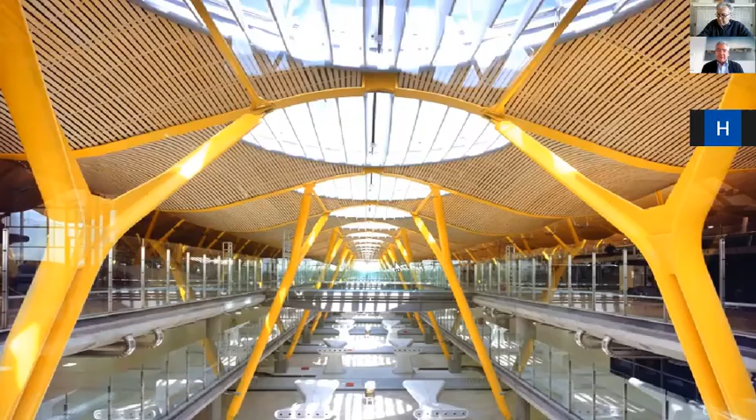Just to put it in context, I hope you see my mouse. The building we just saw is where my mouse is moving. The one on the left, colored in yellow, is the terminal building, the satellite building, which is where you would have arrived. Just to put it into context, because people don't realize how big those buildings are.

They are over 1 kilometer long. You see in the background the Madrid skyline, you see the 4 towers. The tallest tower is 249 meters. If you were to put the terminal building up vertical, it would be this size, 1,142 meters tall. But we're now expanding it, making it even 360 meters longer.

Just to give you an example, the Burj Khalifa, the largest building in the world, is 828 meters. So once the new terminal building is constructed, it would be like building two Burj Khalifas, one on top of each other. And the reason I bring this into context is about real estate decision-making.

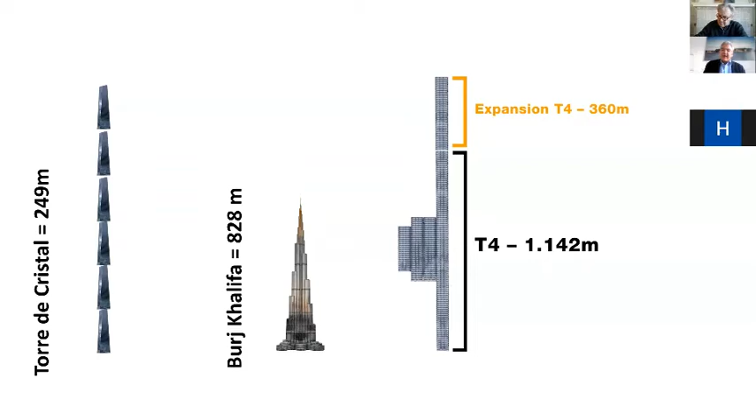What makes a city, what makes a country take a forward decision to build an infrastructure like this? And what's its value? Definitely its value is not how much it costs to build. Its value is how much is the front door to Madrid worth? How effective can this airport be to compete with London Heathrow's hub or with Frankfurt's hub? What type of other advantages and circumstances does this piece of infrastructure bring in connection with high-speed rails, with other parts of the country?

So it's extremely difficult to put a value to something like this. I will come back to other similar issues on value. The airport is up here on the top right-hand corner, and we're moving on to the first project I want to talk to you about, which is in AZCA.

Madrid, let me put this other picture, sorry. This one. Madrid has a central spine, which runs from north, where my mouse is, all the way down to the south. So there's two train stations in Madrid, one on the north, one on the south.

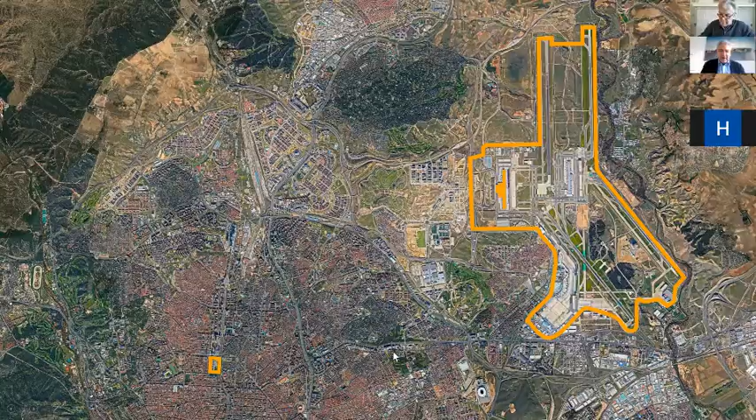And this is AZCA. AZCA was built here. Here's the other train station. AZCA was built in the 1970s as a business district for Madrid. It takes this huge city block, which you see here on the top left. And it's just opposite, for those of you that like football, soccer, Real Madrid's football stadium. Just here, where my mouse is, that's Real Madrid's football stadium.

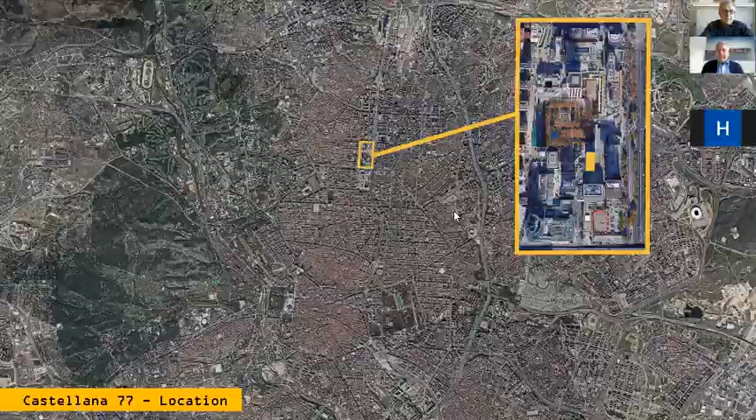And the building that we got commissioned to transform, and I will explain why, was a building that had no identity, had no scale, no technology whatsoever, and therefore was a building that was empty and nobody wanted. You see here where the question mark is, that's where the building actually is. It's actually got an address, Castellana 77, the number of the street.

You used to get into a taxi and say, please take me to Castellana 77, and the drivers wouldn't know what it was. They couldn't take you to this building. It's right there in the middle of that island, AZCA, the financial district. This is the appearance it had at the time, completely empty, nobody wanted it. It was acquired by a developer who turned to us and said, what can you do with this building?

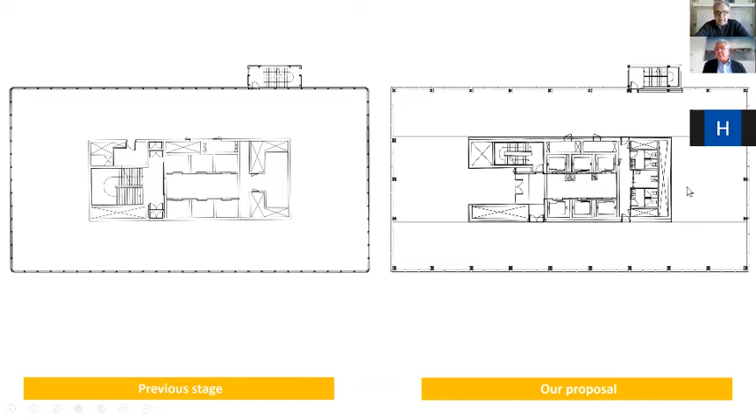The first thing we did was give it a hard core at its core. On the left you can see the 3 elevators and the fire escape, and the building services around the core. We basically rationalized the core, keeping the elevators where they were but changing all the restrooms. We reorganized and shifted the building services, but most important, we moved the staircase to one side so that when you come out of the elevator, you have a nice view out. Previously, when you came out of the elevator, you had to exit through one door and then get into the office space, either left or right. So by changing the core, we gave a lot more value to the actual floor plan.

The second thing we did was use software available to us at the time, along with another one we developed, combining them to understand how the sun hit this building. This is a completely isolated tower with 4 very pure facades, a north, a south, an east, and a west facade. The heat conditions are completely different across them in Madrid, so you have to design thinking about every orientation. Using this software, we developed hundreds of different shading elements for each individual facade.

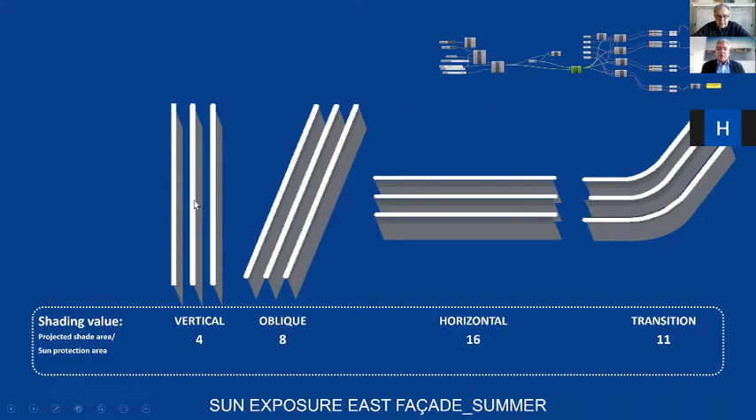One of the things we found was that when the sun is low, which is normally on the east at sunrise, the best shading devices are vertical. As the sun progresses and rises into the sky, it becomes more vertical, and therefore the best elements to protect the facade become horizontal. Then there's a transition that works well between the vertical and the horizontal.

We analyzed the east facade and found that at 11 o'clock in the morning, which is not a bad hour, 58% of the facade would be in shade thanks to those blades. By 1 o'clock, the worst condition with the hottest sun, 98% of the facade is covered and not receiving any solar radiation. We did the same for every orientation.

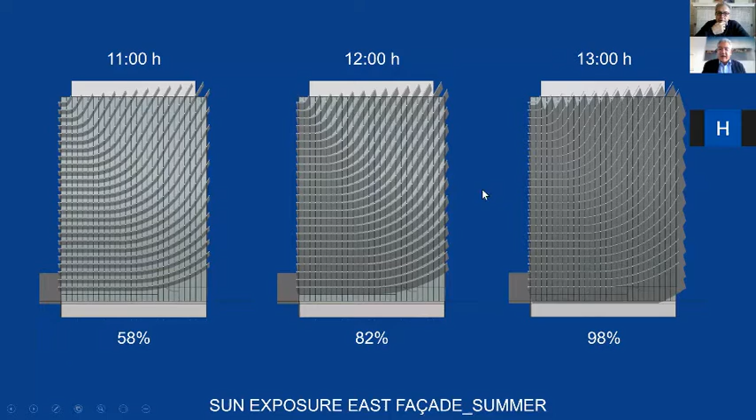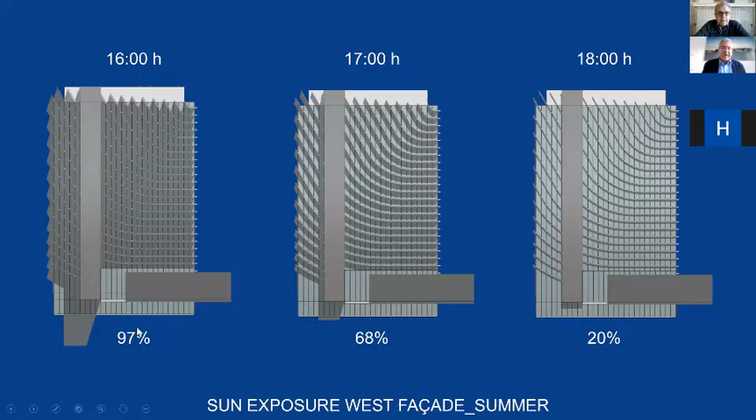I'm just showing you here the west facade, the previous one was the east facade. Again, at the worst hour, 4 p.m., 97% is covered.

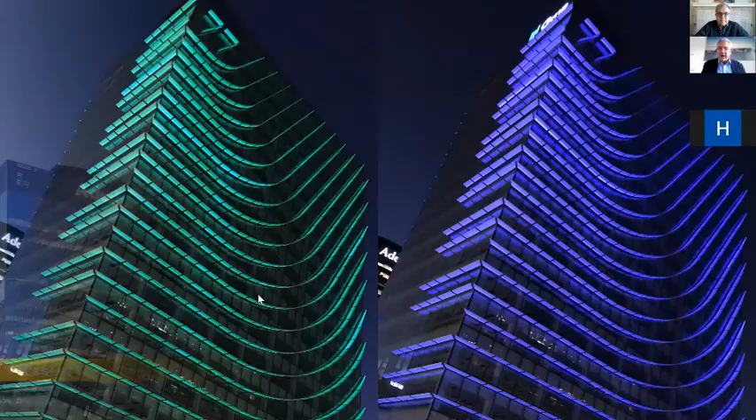This is the before and the after. On the left, the building that no one wanted, and on the right, the building that emerged out of this system, using technology and applying construction technology to make something extremely functional, very elegant, and with other fun bits, like during the day it's unlit, but at night it can be lit, with lots of different things you can do with it, using colors or rainbow effects. So now the building has an identity, and surprise, surprise, it's full. There's not a single square foot which isn't leased, even post-COVID, and it's become the second most expensive building in Madrid per square foot in terms of rent. So obviously the client is very happy.

Let me show you a quick time lapse.

Some of you may think, why don't these shades run all the way through to the south facade? It's very simple: there's an adjacent building right here which belongs to someone else. So the air rights that govern this building, which could potentially grow in height, are what's stopping those horizontal shades from running all the way through the south facade and joining the blades on the west.

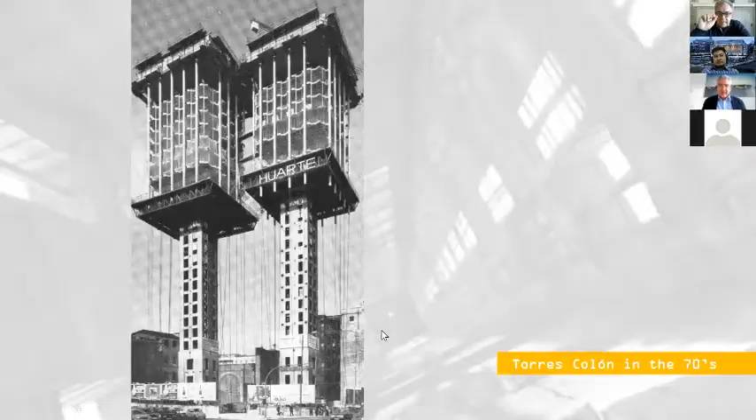who is the owner of those two towers here, called Colón Towers. This is Plaza de Colón, Columbus, which is probably the most interesting urban challenge Madrid faces. They sit here in a corner, and they were built from the top down, using a construction technology in fashion at the time, called suspended architecture.

This basically meant there are no internal columns. You have a central core, and from the central core, you have a big concrete head from which tensors hang or suspend, and the floor slabs go from the core to the tensors. So this was the building in the 1970s.

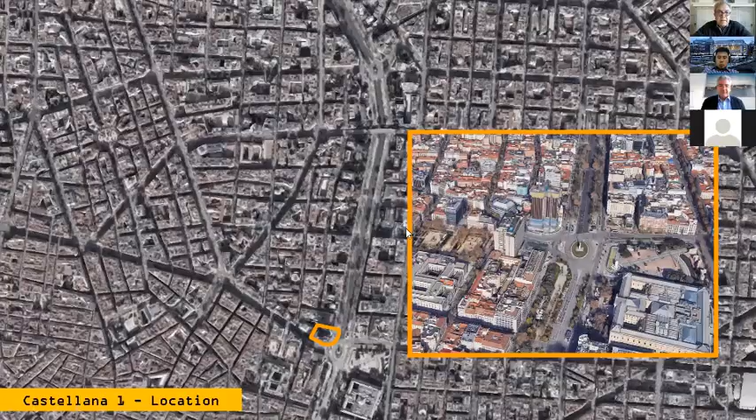Following that, in the 1990s—I've never found out how much this building cost at the time, you'd have to annualize it from 1970—in any case, in the 1990s a British company who owned them initiated a complete remodel, which consisted of a new skin, this orange thing you see. So it actually had two skins, the original one and the new one. They built a new escape stair, this thing in between, and to support this stair, they built a huge beam from which the stair was suspended.

And then they capriciously put all these green things around to conceal the beam, with two lasers shining up into the sky. In the 1990s, the current owner bought these towers for 50 million euros. In 2017, they had an offer for 160 million. So in 17 years, the cost of these towers had risen by more than 3 times.

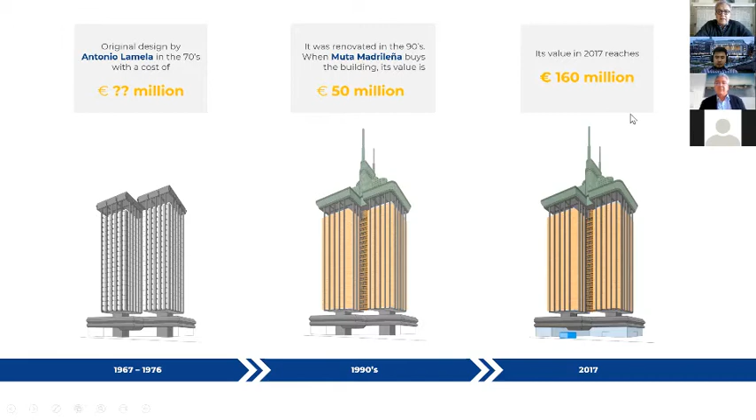Now, why would the client be interested in selling these towers? One, the floor space was very limited and very small. As you can see here, the net available floor to let as office space is what you see in purple, and everything else in white is the gross area. So it had a gross to net of 50%, which is extremely inefficient.

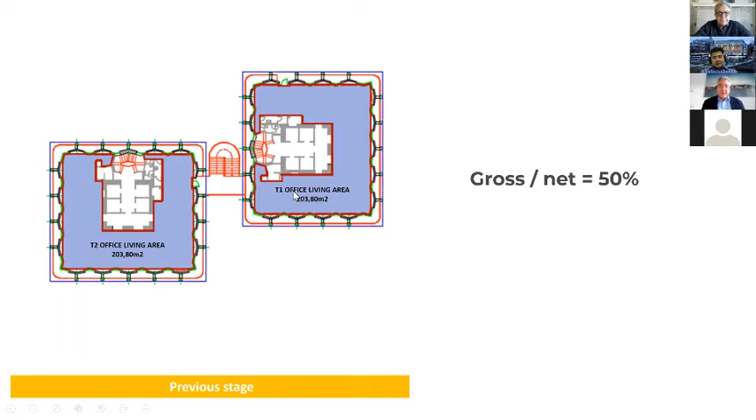Secondly, the towers were not connected, so you couldn't have two floors on the same level. You couldn't cross from one to the other unless you came out through the fire escape. And thirdly, the floor was so small—200 square meters, or 2,000 square feet—which is not a very good office size.

So we actually had a go at this tower, and before the client decided to sell for 160, they were really in favor of selling. They asked us, what would you do with the towers if you could? I said, well, the first thing I would do is get rid of the elevators, as you can see here in black—3 plus 3 is 6—and I would add an extra one, building 7, putting them outside of the towers.

The second thing I would do is eliminate the fire stair and build two new stairs inside the cores, which are those two things you see here. And the third thing I would do is demolish the restrooms, which is what you see in green, and put them into the cores.

Then join the towers, and suddenly you have one floor plate, sufficiently big to be attractive for the market, completely liberated of obstacles like fire escapes and restrooms. As you can see here, this is basically our conceptual proposal. We went from a gross to net of 50% to a gross to net of 81%.

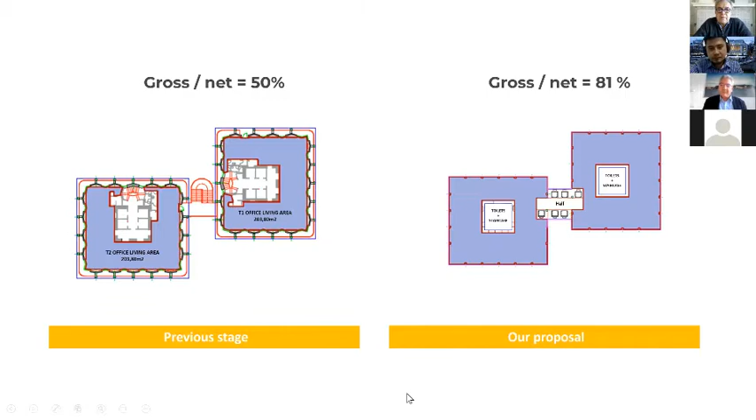There was a proposal that had the elevators in the middle, then they eventually ended up here on the north, as you see. So this was enough for the client to decide not to sell the towers and to commission us to take this project forward.

So the next thing we did was—the city regulations were very clear—we couldn't increase the total area of the building, but we could shift area from place to place. We acknowledged the importance of going higher, and the impressive views we have from up there. This axonometric diagram shows very clearly what we did.

I explained before, we're getting rid of the antenna up here, and we're getting rid of all this fire escape. But the original access was through the basement, so we moved the access to ground floor. Then we demolished two entire floors, here and here, the ones you see in purple, because they didn't really have the best quality. And we chamfered all the corners, and all of that area is what we moved up here.

So I know the diagram looks incredible or impossible, but it is absolutely perfectly square—20,298.3 square meters.

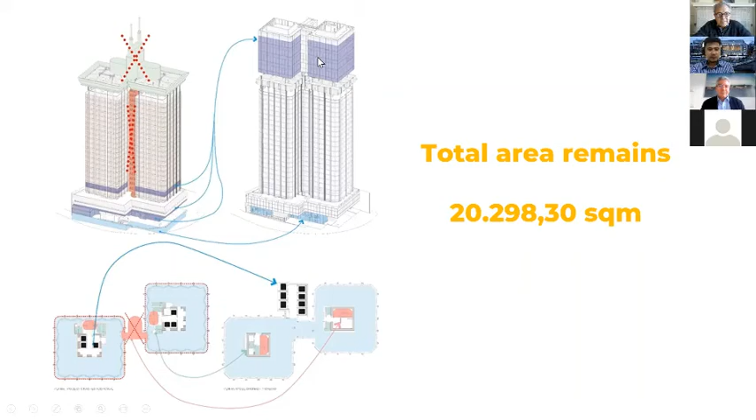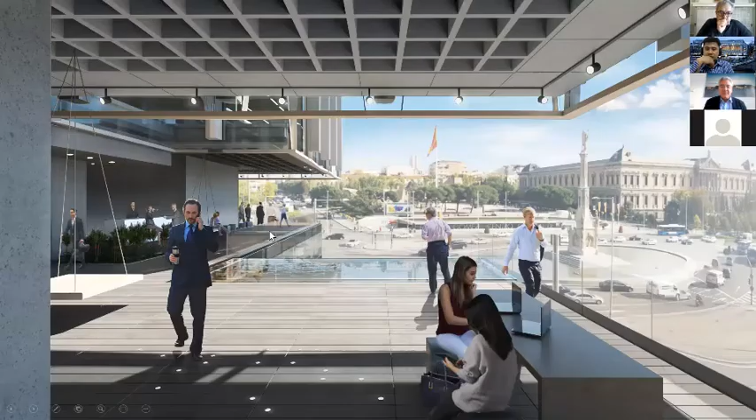And this is what is currently being constructed, it's under construction right now. This will be the new entrance, the one we've brought down from the basement. This is a new terrace that we are occupying. With the demolishment of one of the floors, we get a much nicer height, and we can actually provide this terrace to the city.

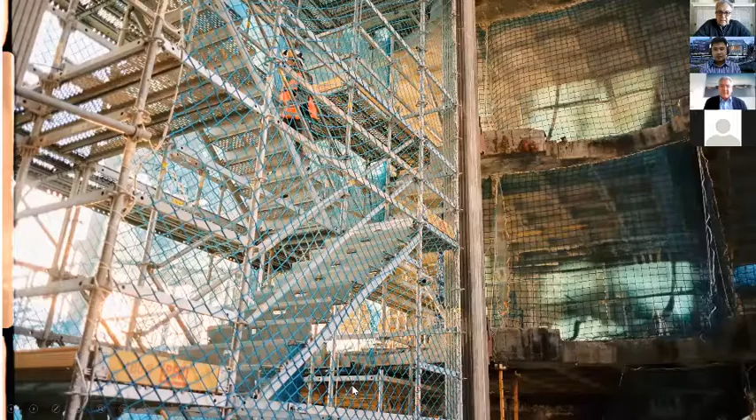This is some photos of the current construction site. You would not believe the state of the footings that we found. There is an underground river, and for the last 50 years that river's been washing away most of the soil, so they looked like they were being suspended by the air.

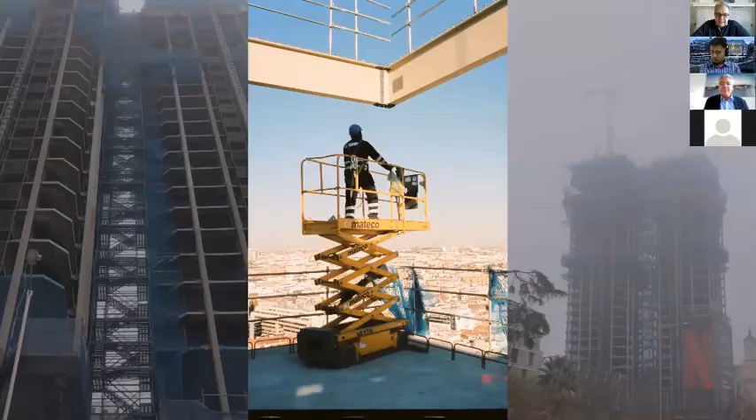And there's more than 80 people down there. They've been working for 6 months, 80 people down there, repiloting the footings of each of these towers. An incredible construction process, extremely complicated.

But my question to you is, what will be the economic value of these towers after our intervention? If you remember, it went from 50 to 160 just 5 years ago. And the current valuation post-COVID is saying that these towers, when they're completed next year, will be, if not anything, above 400 million.

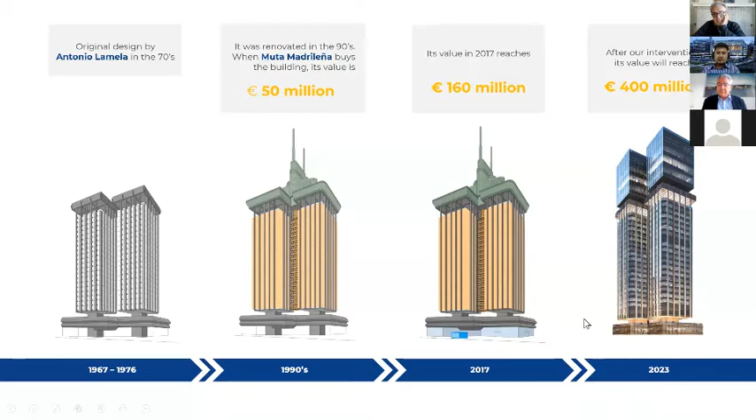So that to me is very, a good investment for a developer.

And I thought I would leave it here for questions, because I think it's more enriching to answer questions than continue talking about buildings. I just wanted to show you 2 examples, which I think covered the 4 topics that Rick set me: real estate value, decision-making, construction technology, and the use of data and visualizations.

I've left public-private partnerships. I have a hospital, if you want to talk about. We've done a number of hospitals under that model, but I thought I would open it for questions now.

I want to, first of all, thank you for a superb presentation. We had the benefit of having a drink together in Lima last week and talking about what students have been doing their research projects on this past semester. And as you mentioned, real estate and valuation and construction technology were very high on the list of 4 topics.

These projects are amazing, and putting the architectural and real estate parameters together in conjoined gets us out of the typical architecture school aesthetic, and the same with Castellana 77 with the starting point of heat gain. There's a logic to everything that you presented that is also, I have to say, as an architect, just quite beautiful. So thank you for that.

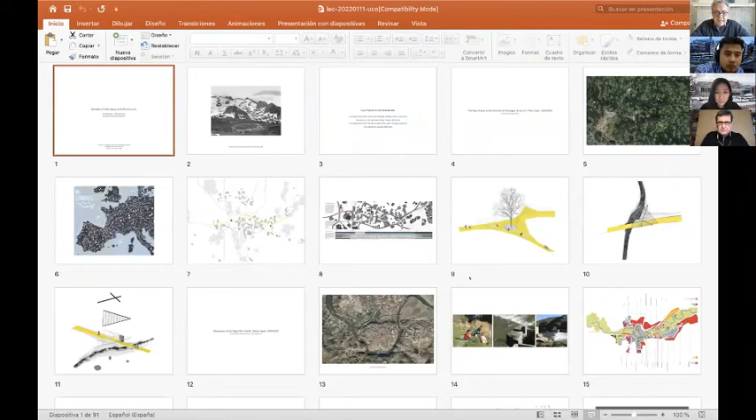Well, we are in a small office based in Madrid. We have been working in other places in Europe and also in Latin America, mostly in Peru and in Colombia.

In places where we find the same spirit and the same way of designing cities, because many places in Latin America are designing cities and public spaces in a very innovative way. But we have, as I said, a very particular approach, with projects in which we share the work with other people, with engineers. No, I would like to begin with this image that you probably know, from Richard Long.

Richard Long is a very famous British artist. Most of the work Richard Long has done in many places in the world is to establish a relation between the human and its artificial way of living and nature, and how simple things like this image, in which we see this circle of stones in the Pyrenees, in the mountains between Spain and France, establish this relation between what's happening with the human, what we need with our infrastructures, because infrastructure is the way in which we are building the world, and at the same time how to establish a poetic and visual relation with the environment in which we are working.

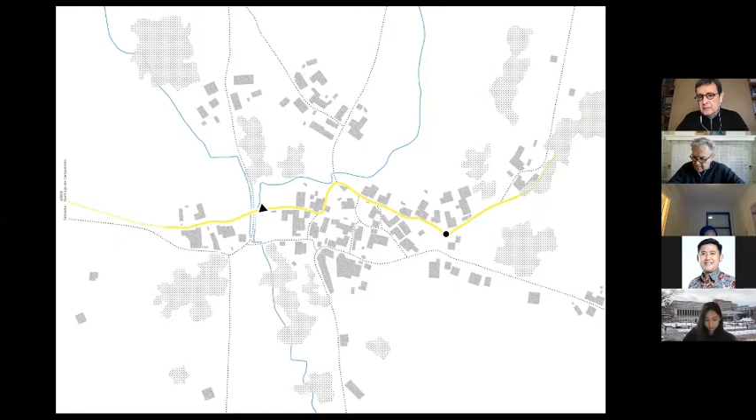That is a rule, and that is the other thing—two places, one is a very small square, just a cross of paths that you can see in the middle, and a place to take a rest in a very small creek where you can wash your feet or something like that.

The understanding of the project is the node, in which we identify places where something could happen, but at the same time the rules for building different categories of urban or more rural ways of designing the path.

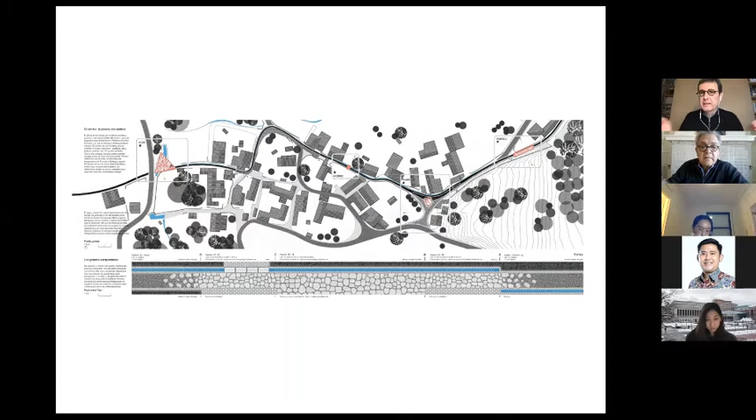You can see in the bottom part of the slide how the path could be very urban in the middle of this little town, or completely rural when you are walking between the towns or villages, and how to establish the rule of the connection, but at the same time what could happen in the nodes or junctions.

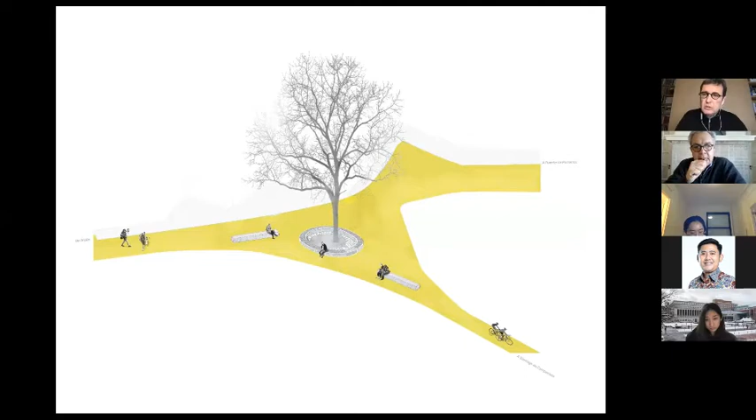This is one simple thing—there is a big oak tree there, and of course now this is a place full of cars without any sense. We try to map this tree and map the pedestrians who could cross completely freely, using the same rules for designing the pavement around these small places where you can join and talk with other pilgrims or with the people living there.

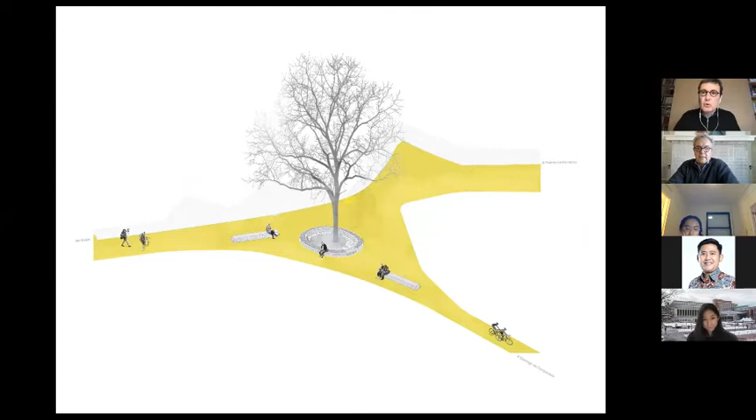And the other one is a shadow—a very small structure that gives protection from the sun. In summer it's not very hot, but the sun could be hard, in the place where the path crosses a creek.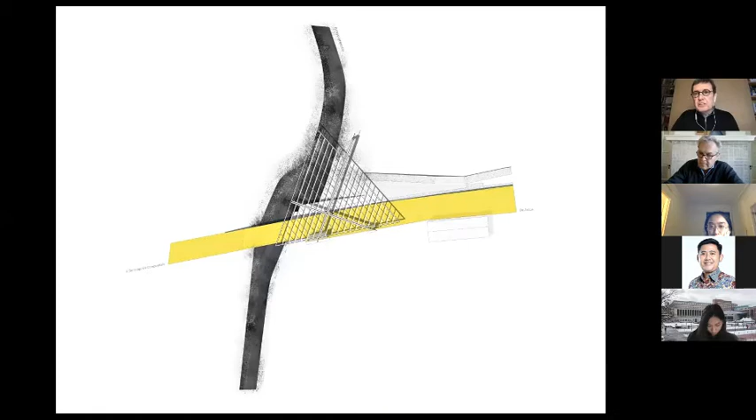You can see here the different layers in which we have been working: the path colored in yellow, the foundations that are completely dry, built without using concrete, just using stones, the structure of the shade, and the vegetation that will cover completely this shadow.

So it's a place in which you can wash your feet, talk with someone, take a rest, and reflect about what you are doing, why you are walking, in which way, where you are, etc.

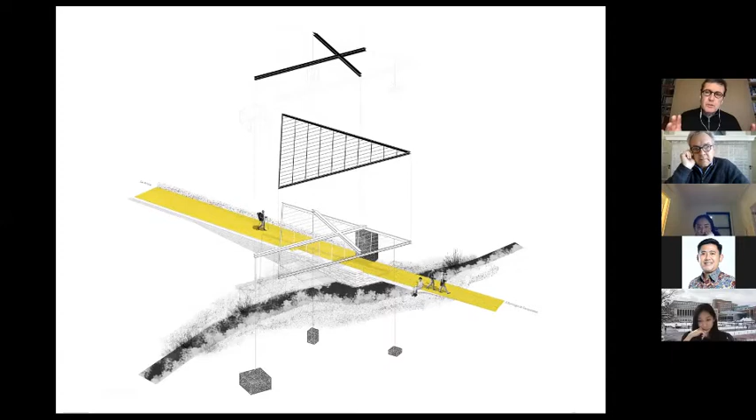So the project consists in finding a rule for designing the connection, thinking that the path is enormous. We're talking about thousands of kilometers of paths, with the idea of extending these rules to many other places along the path. The other thing is identifying the places where something could happen, where people could talk or an event could happen.

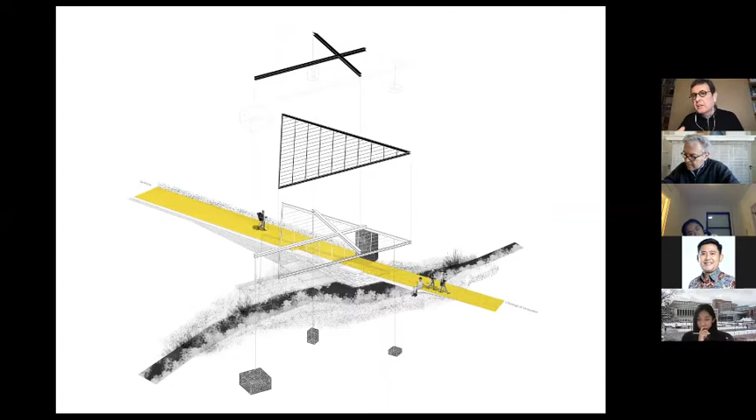Very simple thing, but I think extremely delicate, and always flying or playing with the idea of flying structures—something that you know is protecting you, but you don't know exactly how it's built.

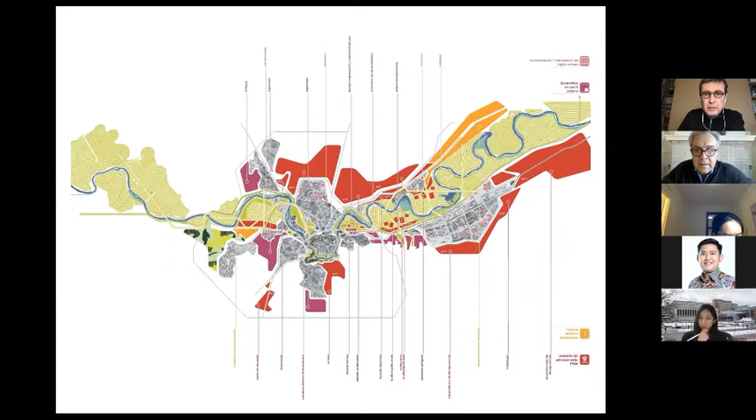So we have the commission for the restoration of the margins of the river along a big area of about 30 kilometers. We've been working there for many years, trying to understand this valuable place—completely artificial, but at the same time with very high natural values, because the river is important, but as I said, very artificial, since in the last 2,000 years these places have been manipulated by humans.

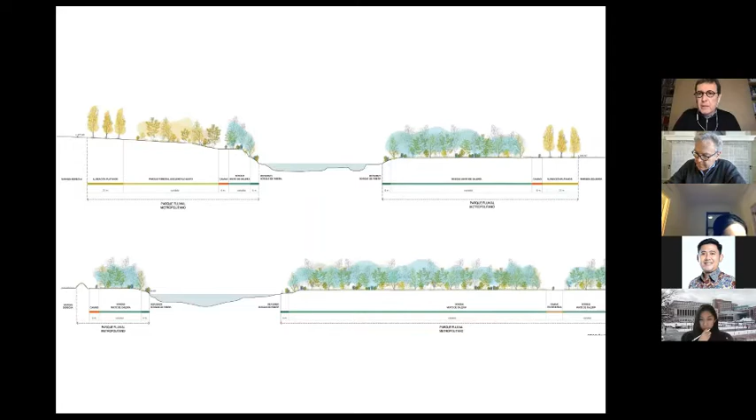So the first part of the project was how to deal with this big area. We tried to understand, in terms of ecological issues, how to reconstruct or renaturalize the borders and sides of the river, because the topography had been manipulated for flood protection and so on. Also in the inner part of the project, close to the city, we tried to understand the events that happen there.

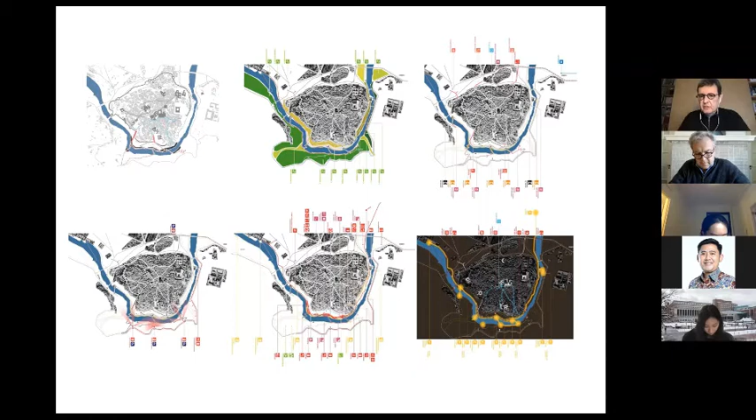The river is also very artificial, because there are many small dams for producing electricity, all from the 19th century, and mills that use the water and so on. So this is a place where the mixture between the artificial and the natural is very difficult to distinguish. And this is the place that you see.

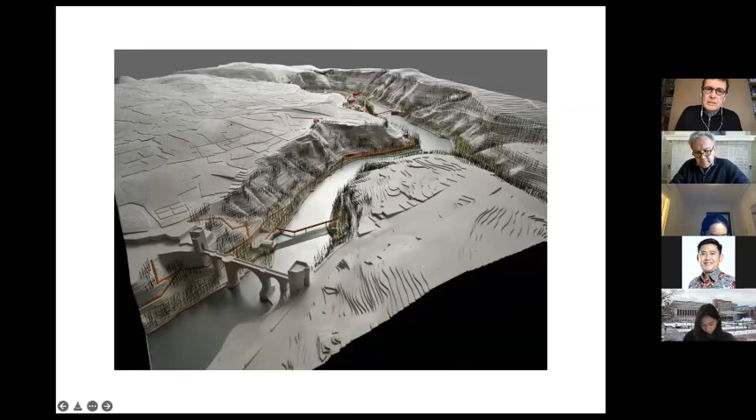So this is a very dramatic creek with steep slopes. Here you can see on the left side of the slide the hill where the city is settled, and the river at the bottom. The problem here is accessibility—how to go from the city to the river. It's easy to go down, but not so easy to go up. How to deal with and protect the nature there, and at the same time offer the city a place to be in a secure, comfortable way.

How to deal with the machinery and the industrial heritage that the river has, and how to cross the river.

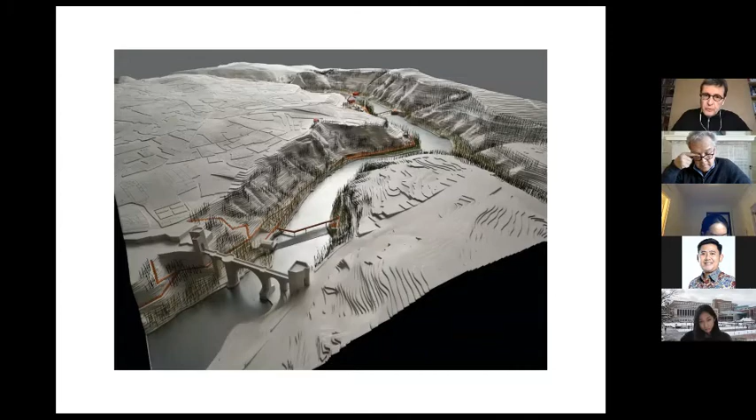So you can see here the model, and then these bridges that we propose, which I'm going to talk about, and this green area that is the places in which we work, and this yellow path that is like an urban salon or urban hall, an urban space in which you are mixing what's happened up and what's happened down.

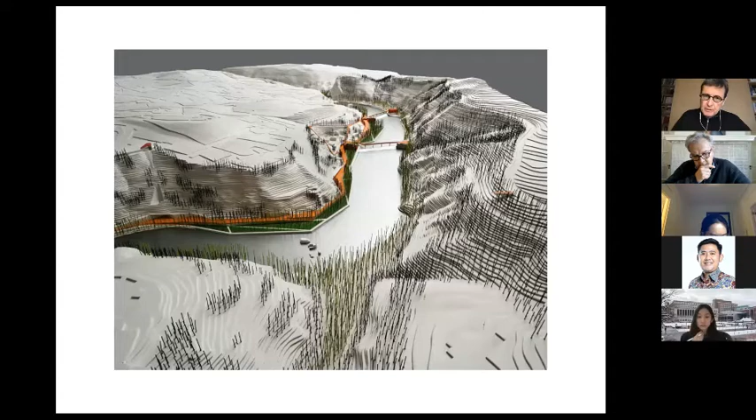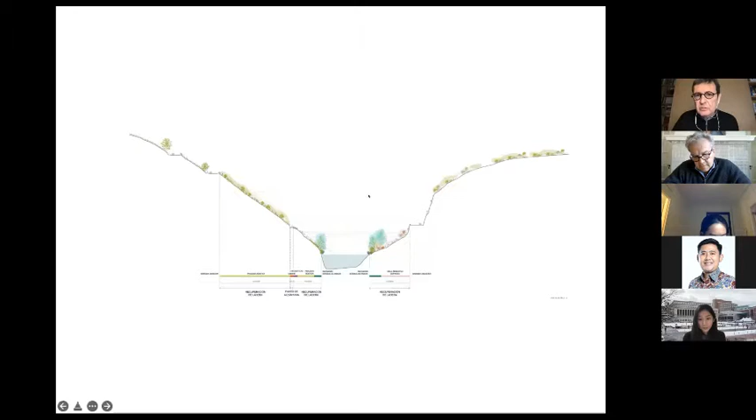So this is the model, and you can see here the sections of this place, which are very dramatic, because as I said, when you are down, close to the river, you cannot see anything except the nature and the river. Here you can see also the next one.

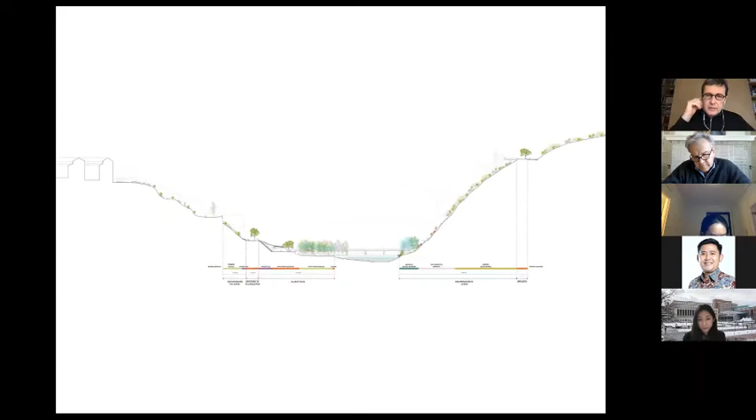Well, of course, we work here on the renaturalization of the slopes and so on. So this is the sections in the different places.

But I would like to talk about these bridges. So we designed 3 bridges. Of course, Toledo is an extremely conservative city because it's a very valuable heritage, so everything is extremely difficult. Many people have to talk, many people have to approve the projects because it's also a UNESCO World Heritage site.

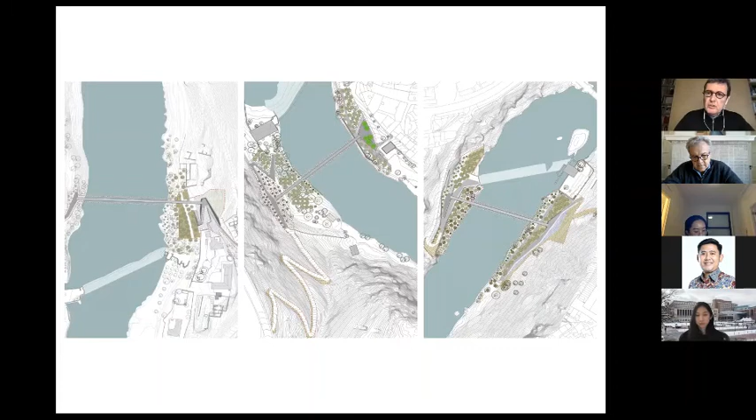So how to cross the river without producing an impact, and at the same time how to design a bridge including the flood levels, because it's very narrow and the flood levels are very high, trying to make something that at the same time is like a miracle, so you are crossing the river in an artificial way that seems like flying over it.

So I'm going to talk about this, and this is the bridge. It's quite long, more than 100 meters, and we use a structure that is a stress ribbon. It's a very paradoxical structure because it seems like it's working in compression, but it's not — these pieces are working in tension.

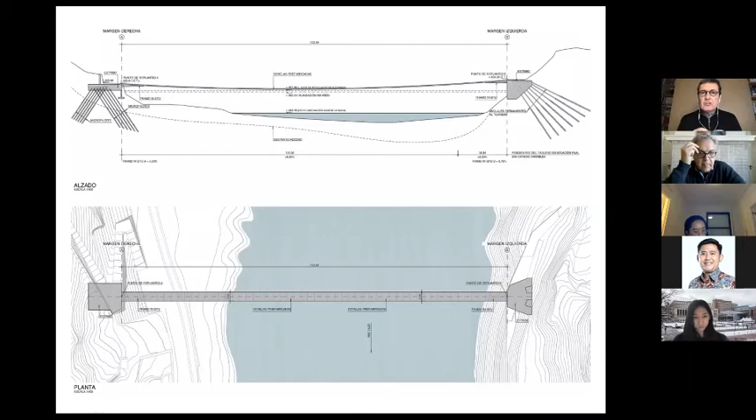So we can cross the river using only a slab of less than 1 foot — I don't know how to say it — the thickness, the space that we need for the slabs.

So everything is extremely slight and very light, but we have to make all of this in the foundations. So this paradox is: for having something extremely light over the river, we need a lot of material and a lot of effort underground, because these bridges don't work by gravity, they work just by tension, so they need to be completely engaged, anchored to the rock.

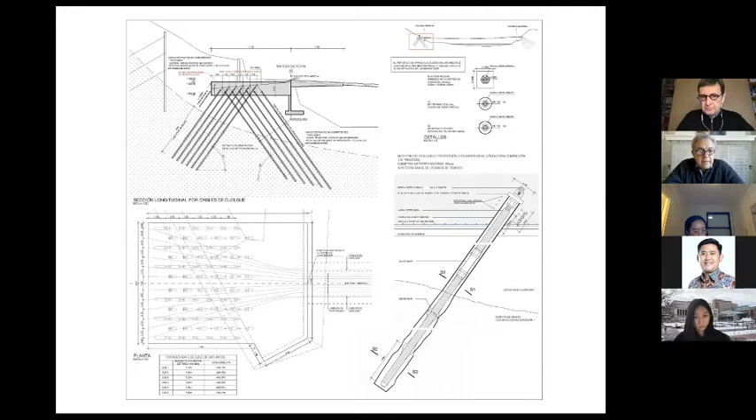So the process of understanding how to cross these places, how to use this structural typology, is what we're talking about. The foundations are extremely complex because everything is very difficult, but this is the way of working with something that is extremely light in this marvelous place.

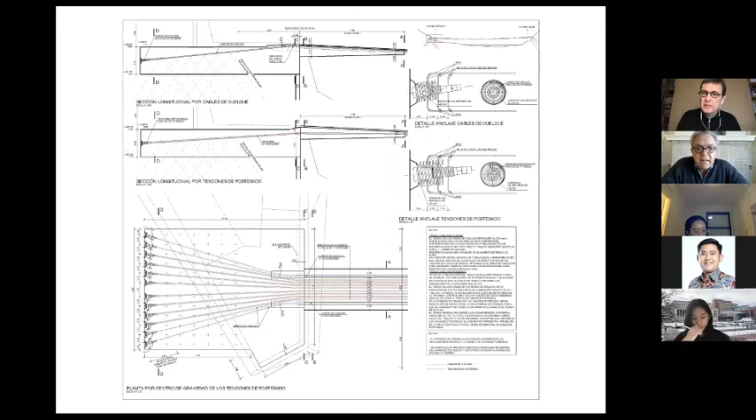So what I would like to transmit is how to select the engineering work for building and designing this kind of thing. How to cross seems very simple, but it's not — how to deal with different uses. This is an engineering problem, but we have to deal with other things that I think are very important.

Second thing is another bridge. This bridge is in the northwest of Spain also, crossing a big river. In that case it's more important because this is the border between Spain and Portugal, and because the river is not narrow, there are very few crossings, so it's not easy to go from one side to the other.

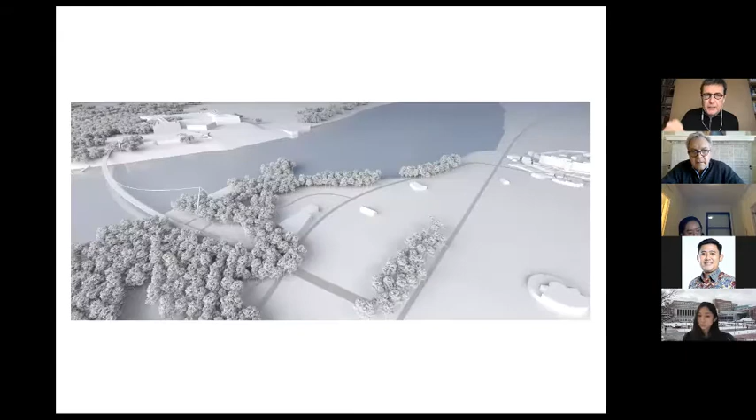So the commission is to connect both public spaces, in the north and in the south, in Spain and Portugal, in a very valuable heritage and landscape place.

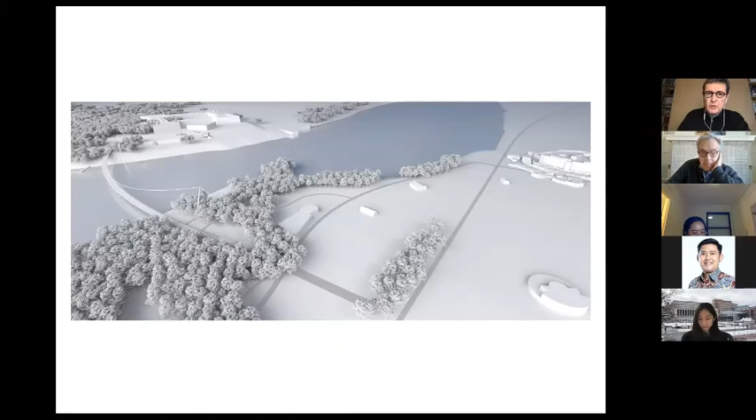So here the question was, what is the right place to make this connection between the village in Goyán, which is in Spain, and the village in Portugal, which has different issues. For instance, the railway is in the south, in Portugal. In Spain there is more water, or different offers.

So both villages offer different things to the population in the north or the south. And of course there's this fortress and its surroundings in Spain, and this more family-oriented open public space in Portugal.

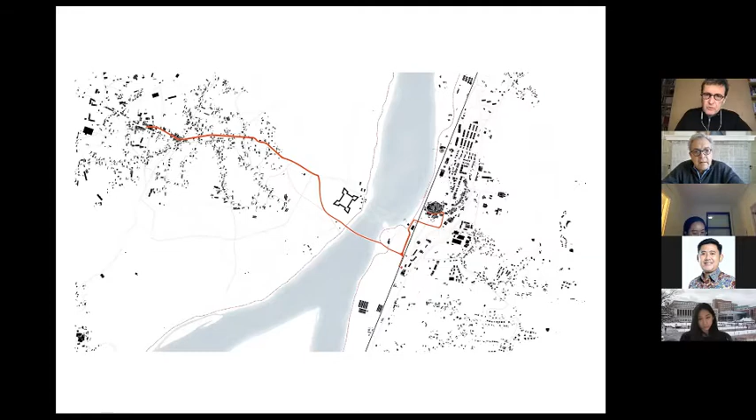So these are the two public spaces that the bridge connects. The bridge is also, in itself, an event.

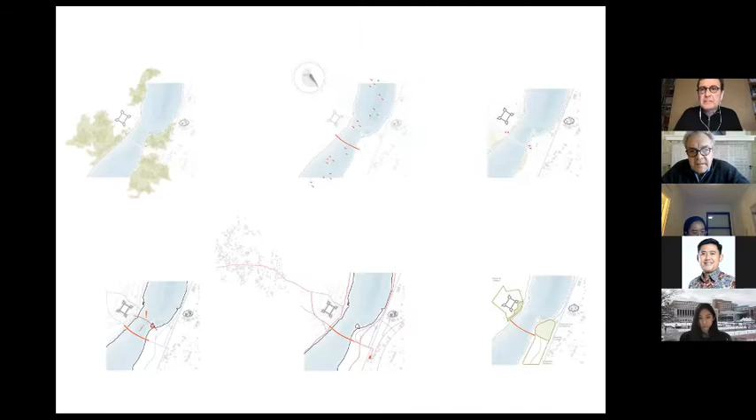Wait a moment. Okay. Yes, so this is the bridge.

In that case, we selected a different structural typology. It's a hanging bridge that has the traces of an arch.

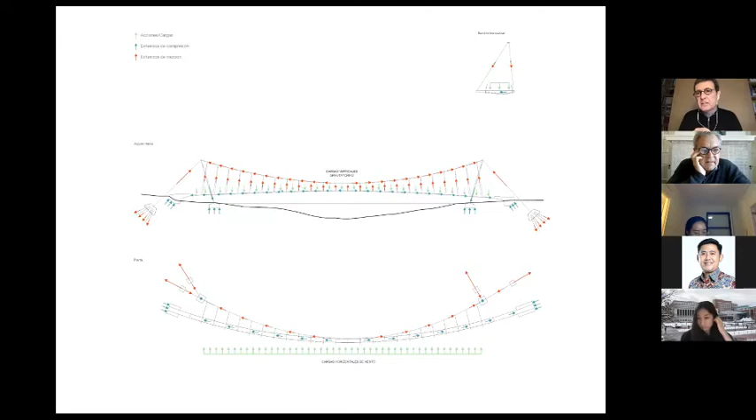So for that, many other things related to how the bridge works are important issues, but the same happens as in the other bridge, in Toledo: to build something very slight and very light over the river, you need very powerful and very heavy foundations.

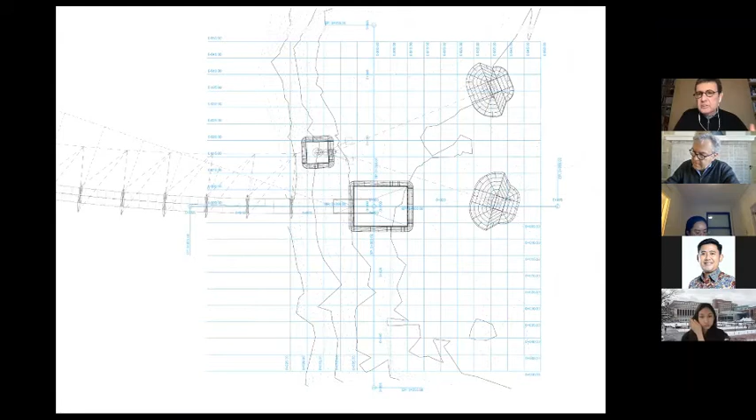So how to construct a new event, how to build something that uses a language that is silent, not very spectacular in some way, so that you have the feeling you are walking over the river.

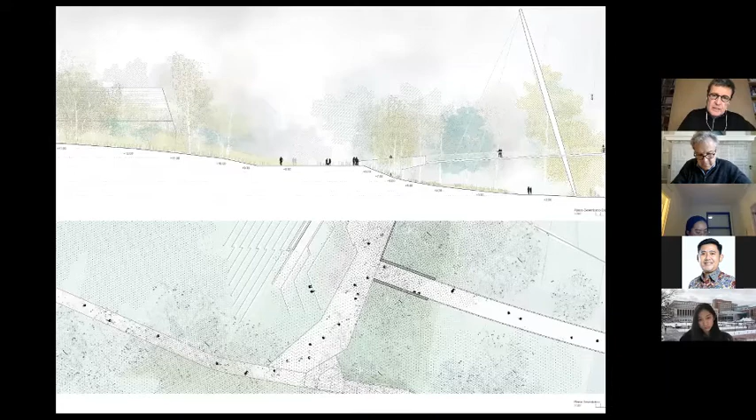Now we are building the foundations on both sides, and I would like to talk about how to deal with this. In this case, it's a big infrastructure, because this bridge has more than 300 meters of span, so it's a big bridge. How to build a place, but at the same time not be oppressive or diminish the importance the surroundings deserve.

And this is the last project we'll talk about, Madrid Río. Well, this is a very big, very complex work which we are still working on.

So we began to work in 2005, and now we are still working, and I think we will finish the last part in 2025, so we have been working more than 20 years on this place. We are really lucky, because this opportunity was fantastic for us. So what happened here? Madrid also has a river, a very small one, that crosses the city in a diagonal way.

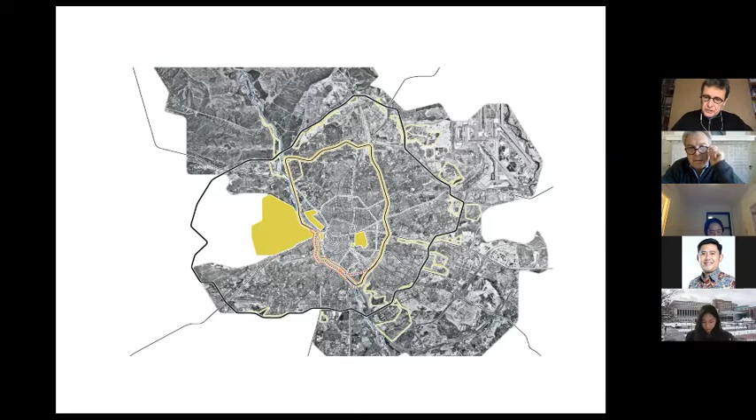Like in many other cities, more rings or highways have been constructed in recent years. So what happened there? In 2003...

In 2003, the M30 highway was very close to completely collapsing, like in many other places. The city realized the highway was extremely aggressive toward the river—it was completely impossible to walk around, cross, or walk along it. The river had completely disappeared under the bridges of the highway, so the city decided in 2003 to cut and cover, to put underground, the highway that was built on both sides of the river.

And they pulled it off amazingly. This was extremely complex work, because all the big pipes and infrastructure the city had were installed underground on both sides of the river in complete disorder over the last 40 or 50 years. So to make the tunnels on both sides of the river, they had to remove all the pipes—gas, telecom, water, sewage, everything—move them elsewhere, and then build the tunnels. It was a very, very complex civil work done in a very fast way.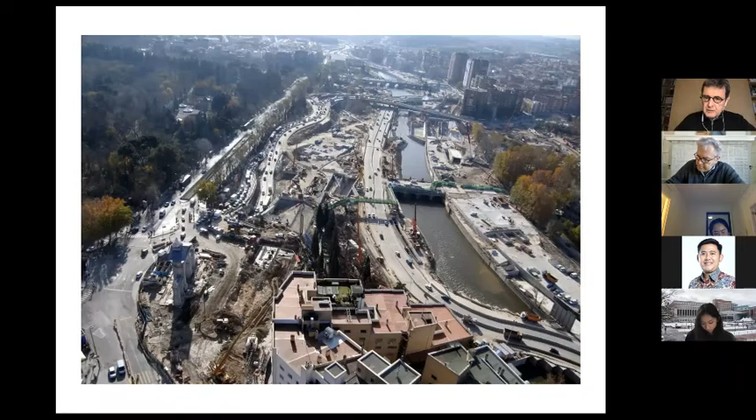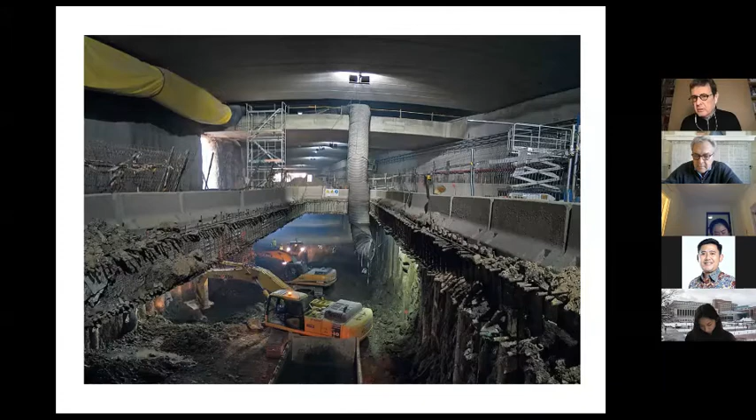These aren't just simple tunnels—the real problem isn't the tunnel itself but the junctions, like a plate of spaghetti, because when you have a highway you have to connect it with the city, go down, then cross, and so on. This amazing underground project was built in Madrid between 2003 and 2007. They made it—it was a success. Here we can see the mayor, very happy at the opening in May 2007.

But what was happening meantime? Nobody had time to think about the city itself. So in 2007, an enormous vacant lot emerged in the center of the city. You can see here no cars, because the cars were now underground, leaving this enormous vacant lot that nobody had thought about.

They didn't know what to do here, because the M-30, this green road, is very close to the city center—it's the first ring. So the city discovered this enormous place on the border of the river, close to the city center, and the question was: what can we do here? We had been working hard on traffic engineering and tunneling, but nobody had thought about the city. So in 2005, the city held an international competition asking exactly that question.

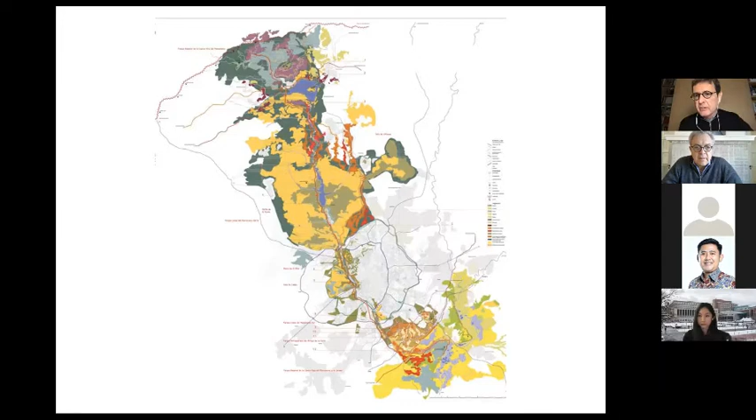We tried to understand the geography of the place to solve the problem we had in a small section of the river, the place where the river crosses the city. If you walk along the river to the north, you find places in the mountains, in the sierras in the northwest. Then you cross this fantastic, well-preserved Mediterranean forest that you can walk along for 60 or 70 kilometers, and at the end in the south you find a lagoon landscape where the river meets another river. So the river is very small, but it's very valuable.

Many things happen along the river, and we won the competition because the city council understood that we have to know what we're working with, and we are working on a geographical issue. The river is not an event of the city. It's the opposite: the city is an event of the river.

Of course, many other things happen along the river, because the place where the highway was built, on the banks of the river, was like a key part of the network of green spaces of the city of Madrid, which is completely connected with the topography and the hydrology of the city. The creeks and the river are how the city has been built, and the green spaces build these spaces through the topography and through the ways the creeks flow to the river.

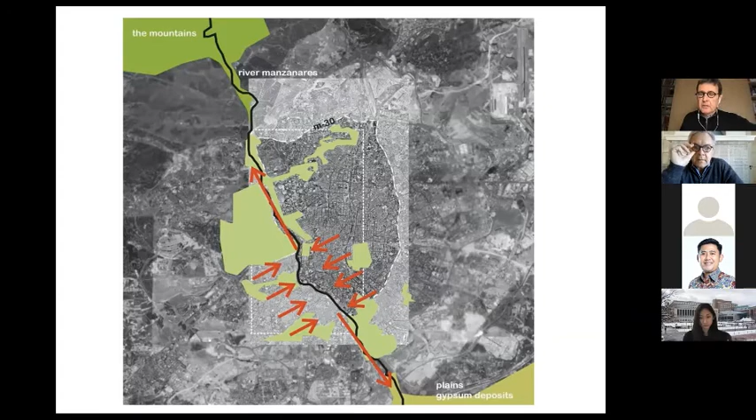So solving this small part, the whole connection of the river has a completely different understanding. It was very important to understand that we are not working in the city, we are working in the river, and what happened is figuring out how to connect the landscape in the north with the landscape in the south, through the city.

Another tissue, another network of green spaces appeared in the city that was completely hidden by the highways, because as I said, many of these highways were built on the banks of the creeks or of the river. So this project is like the keystone of a bigger structure that now we can enjoy in the city.

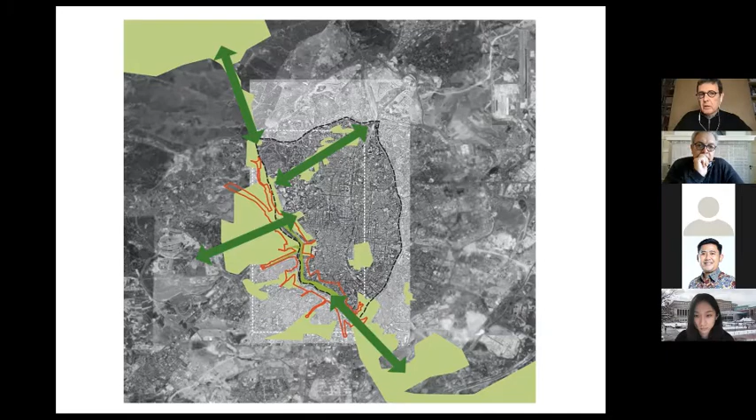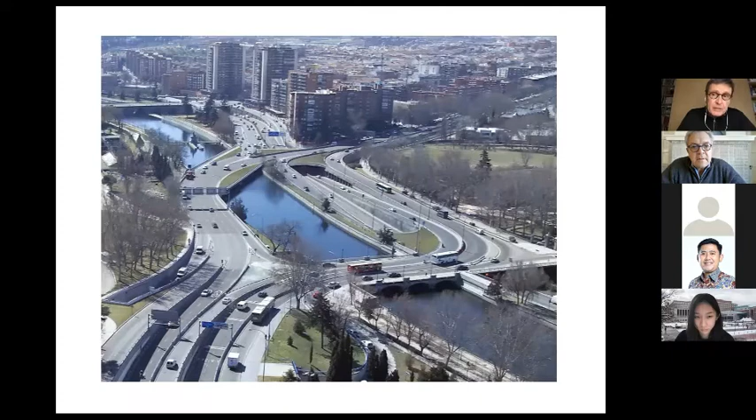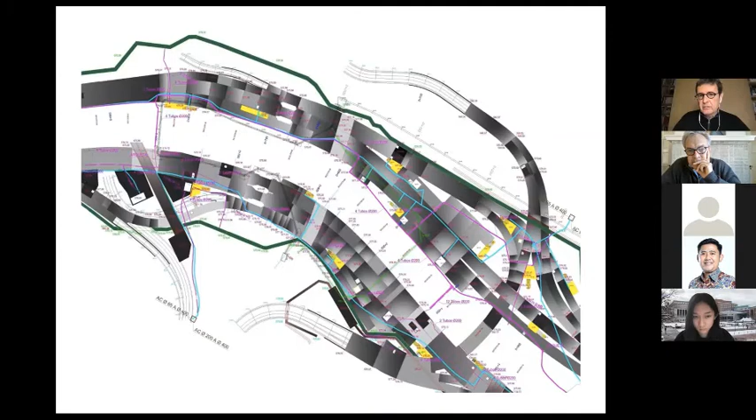The highway was built on the banks of the river, like in many other places in the world. Most of the space we had been working in is completely artificial - this complex spaghetti of networks, of pipes, sewage, highway, tunnels, electricity, telecom. All of these things, in a very compact city, were put in the same place over the years. And we built - that's the right word - this open, green space over this artificial, underground construction.

I have a few photographs of the project that you can enjoy. These photographs were taken 10 years ago, so now the trees are bigger, and I think it's very strong.

Visiting this place is really powerful, because you have the feeling that the city is completely renovated. The river used to be the back part of the neighborhoods; now it's in the core, in the center. A big part of the city changed completely because of this project.

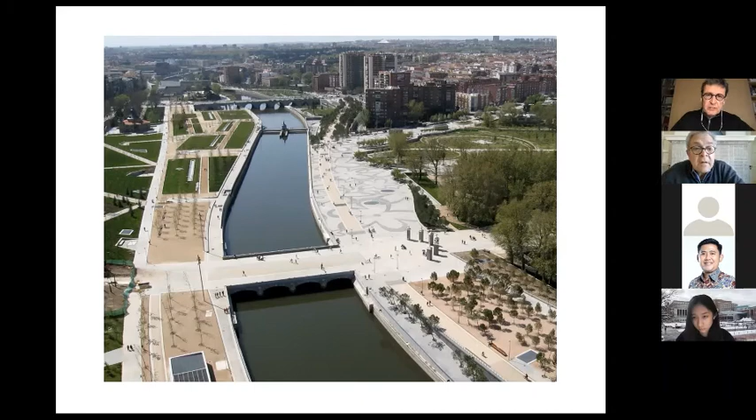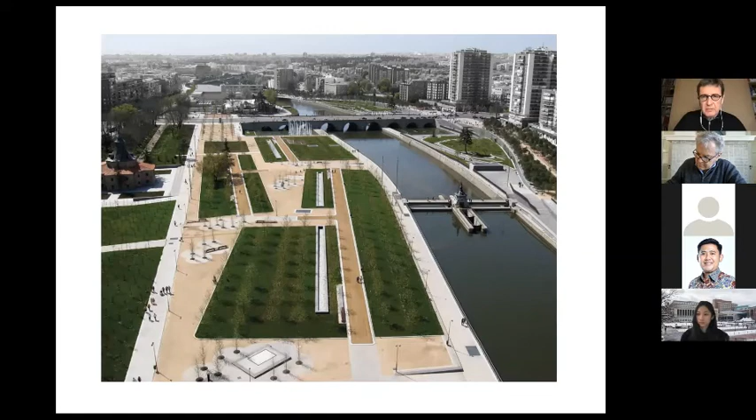I have this series of photographs of the places we've been working, trying to show that behind these gardens there is a huge highway and a huge amount of infrastructure, because infrastructure isn't only about vehicles or cars, it's about all the things we need. Many of them are extremely expensive: high tension electricity, high pressure gas pipes, and all these things are really in the same place.

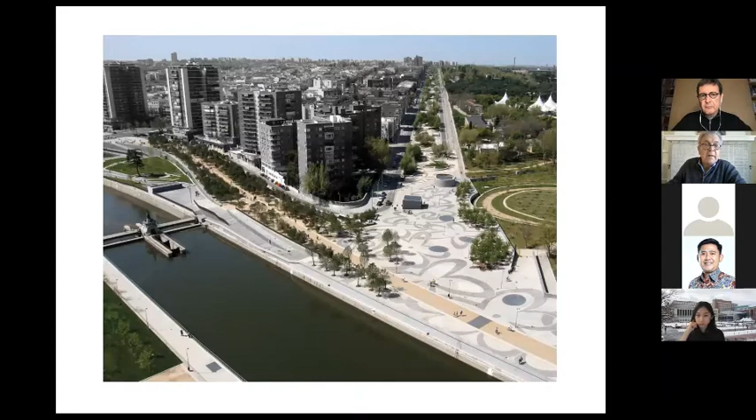You can see these places that were completely occupied by the highway and the junctions, and now we have this space that seems completely natural, but it's not - it seems like it had been there for many years, but it's not. And we were very lucky, because it was a big success in terms of the people, the citizens, who enjoy it every day, every hour.

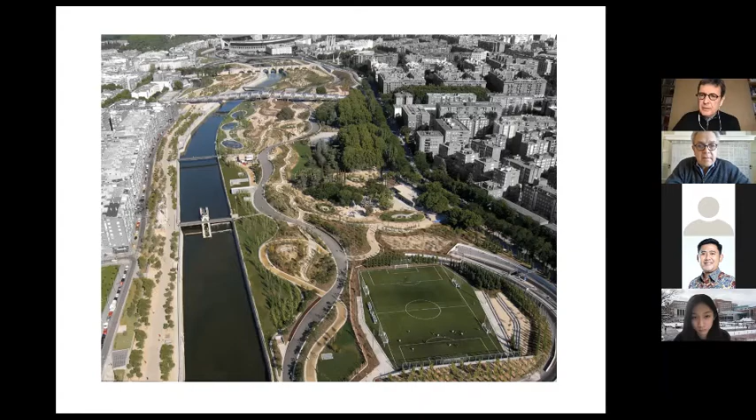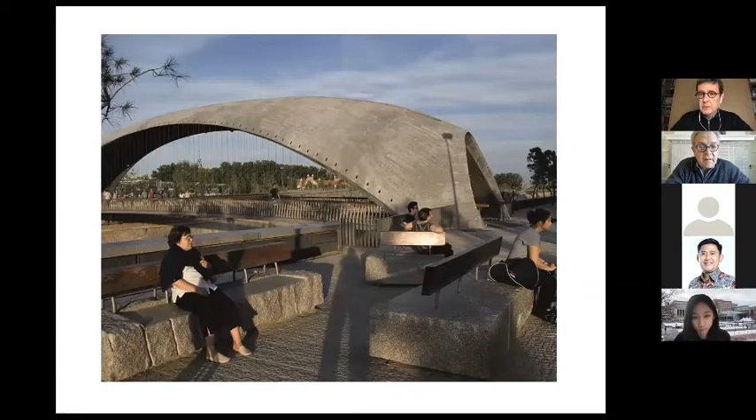We had to deal with infrastructure, because we had to build bridges, since the highway was on the banks of the river. To cross from one side to the other, you had to go up, then go down, then cross the highway, and so on. So for that we designed many bridges and other infrastructure, like sports facilities. This is the atmosphere of this place.

It is, in some way, like a restoration of something that disappeared perhaps 100 or 300 years ago, because the city had been very aggressive toward these places.

Okay, and well, that's it. So...

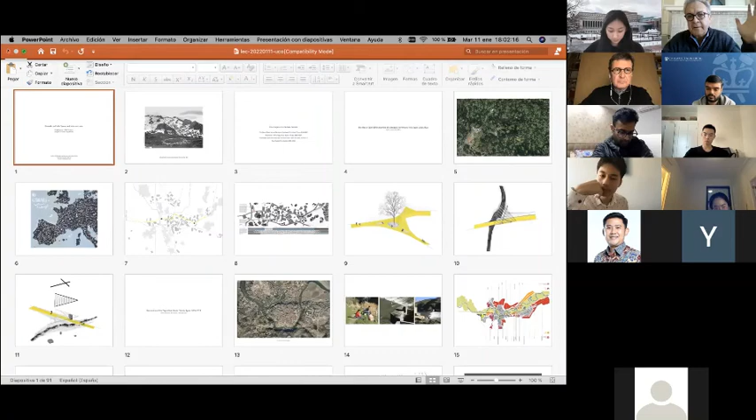an issue of connectivity. All of the projects, at whatever scale — the Camino de Santiago is part of a historic and incredible system of connection, the smaller bridges and the riverfront park are all about connection. We've seen efforts toward connection in other cities around the world, projects similar in some ways, small-scale connecting bridges or pedestrian bridges particularly, like in New York, the Hudson River Park, or in Paris, the Berges de Seine. There are many riverfront parks, from Pittsburgh to other places we could talk about, but this is done so skillfully and with such attention to integration, as you were describing, of infrastructure.

The example in New York, and I'd love to walk it with you next time you come to the States, is the High Bridge, not far from the Columbia campus, in Washington Heights. It was built as part of the Croton Aqueduct system in the 1840s, finished in 1848, and it was the pedestrian bridge on top of the infrastructure that brought water from the mountains to the north, to the Croton Reservoir, where the public library is now in Midtown.

And it was closed for 40 or 50 years, ostensibly because of fears of structural problems, which were fictive. It was really about the socioeconomic disparities on either side of a pedestrian bridge, perceived risks and distances.